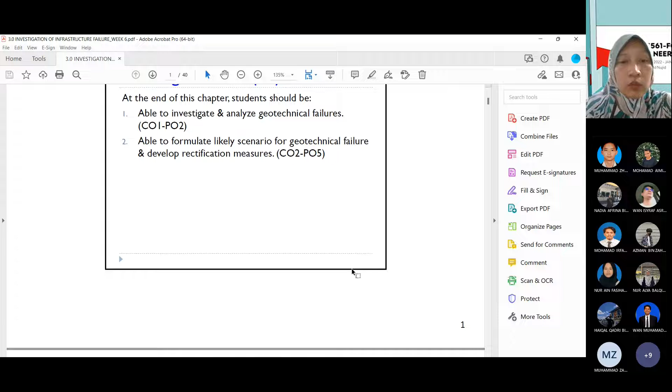The problem and the solution must be in line with the guidelines given by the public authority. When you propose a solution, make sure that it is applicable to be constructed on site, avoiding any future failures or hazards.

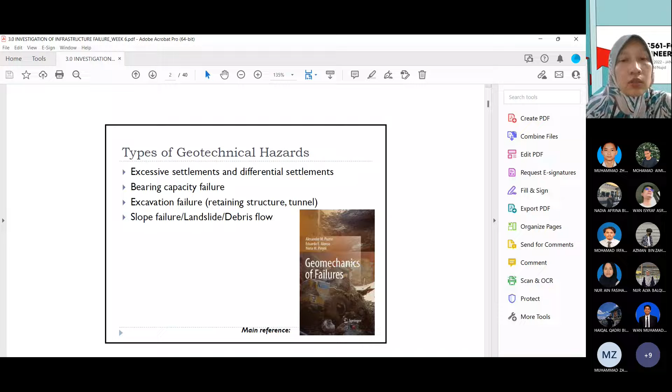These are the types of geotechnical hazards. This is also a textbook that you may refer to for further readings. It's very helpful because, as I said, some notes given here are short and not in detailed explanations, so for a full explanation of what's taught and what the notes given here mean, please read from this main reference.

As I said, your learning activities are split into two groups of geotechnical hazard. For example, you have to deal with excessive settlements and bearing capacity failures in week 6 and week 7. The next, week 8 and week 10, will be on excavation failure and slope failure.

In Malaysia, mostly we may encounter slope failures, landslides, or debris flow. You can take any past case history, such as what we had in Yan, for example—the news written on paper mentioned the landslide or massive flood due to the kepala air. So you can take that case on paper to be your forensic case history, and then how do you start investigating work from the beginning to the end.

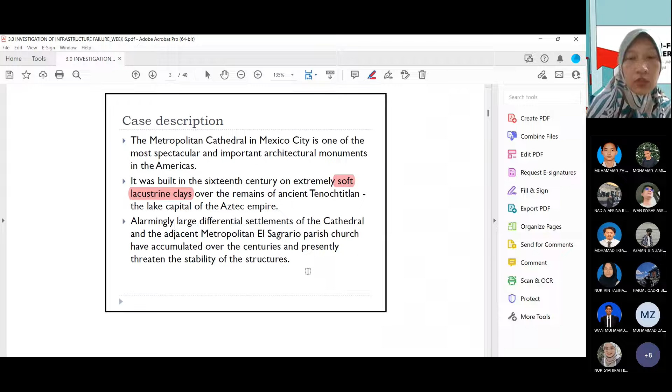If you check the definition of investigation, there are a lot of processes involved. It's not a one-step process. You have to do step 1, step 2, step 3, from the initial step to the final step, and these are the things involved in the process of investigation. For the stability of the structure, what they're afraid of is that the building may collapse. So we try to prevent any historic building or architectural monument from failure.

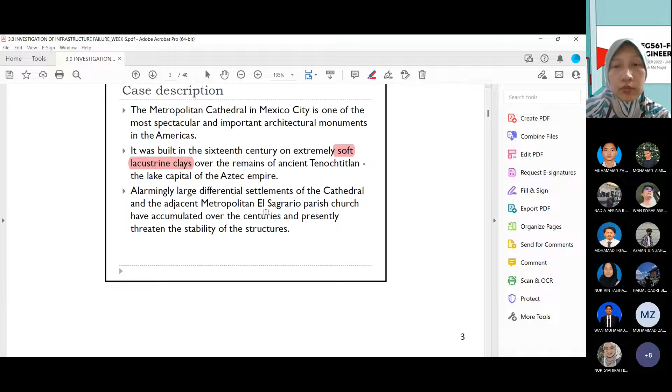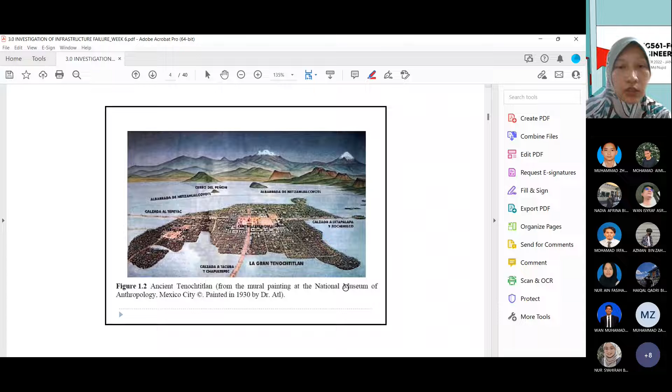Okay, in their study, they took it back to the recorded soil stratigraphy, the soil profile. This explains what causes trigger the settlement, the structural failure, or structure instability. You can see the geological history of the site, and the case description explains how it was started.

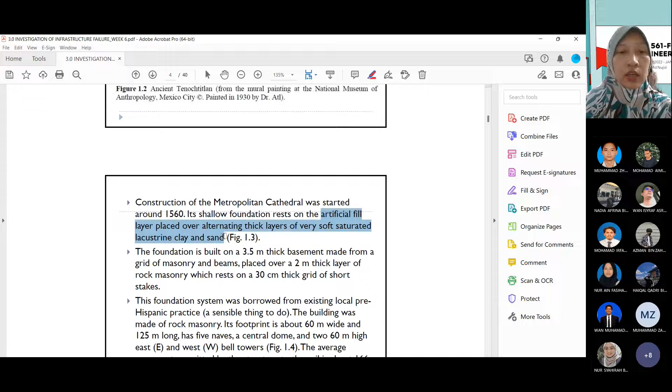The construction began in 1560, and its shallow foundations rest on an artificial fill layer placed over alternating thick layers of very soft saturated lacustrine clay and sand. So where is figure 1.3? This is figure 1.3. When you are reporting your forensic report for your project group, it is good to also include the soil profile, so we can understand what type of soil is beneath the structure, whether it consists of strong or hard layers, or weak or very soft soil. From this, we can see that on the left and the middle of the building, we have different soil properties at different depths.

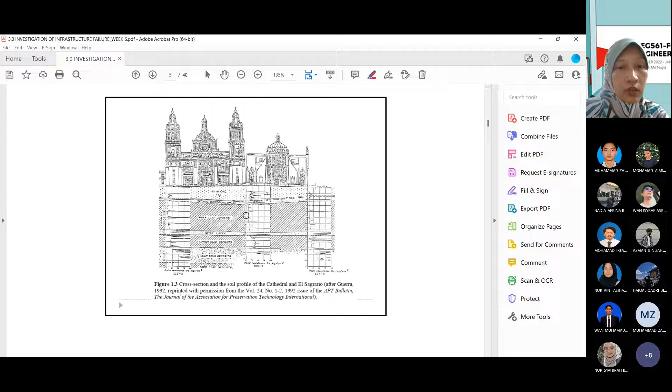This is also the explanation. It says the foundation is located on the artificial fill. When you have artificial fill, which is not located on the original parent rock or parent soil, there's a possibility the structure will not be stable. Because if you do fill, embankment or earthwork, it doesn't bring the original properties of the soil. So we are not sure of the artificial fill's characteristics. Is it capable of carrying the maximum load? When you decide to use fill earth material, you have to consider whether the soil layer with a certain volume can carry the maximum load from the structure.

Other than that, from this information, the foundation is built on a 3.5 m thick basement made from grid masonry and beams placed over a 2-meter thick layer of rock masonry, which rests on a 30 centimeter thick grid of short stakes. When you read this case description, you can see that this can be a cause of the failure itself. It had a basement, and the foundation system was borrowed from existing local pre-Hispanic practice. So as I said, when you have borrowed or fill material, what might it bring you in the future? Is it safe or unsafe?

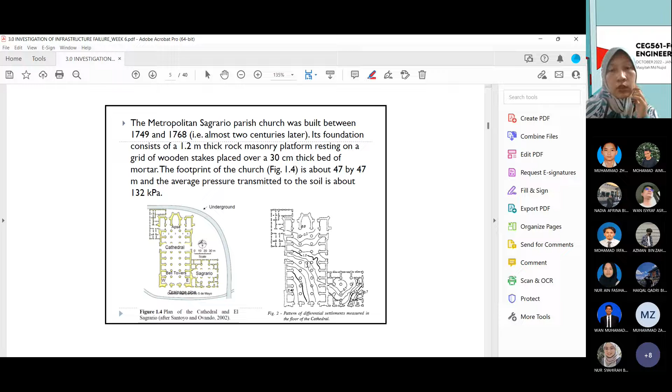So another important thing is on the stress: pressure, overburden stress, effective vertical stress, and then what is the stress history, because the overburden vertical stress can be calculated from the load applied on soil, and also you have to consider the stress history from the clay itself.

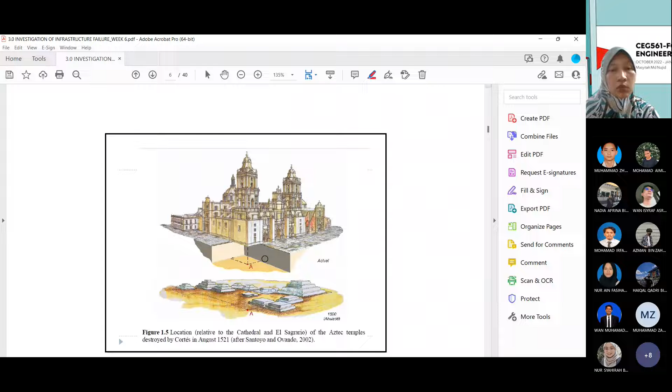So it shows here how they transform from the plan view of the building that relates to what has been reported 1,500 years ago. So this is the stress point at A. You can do some calculations on the effective vertical stress. So now we go to the analysis.

So it says that it is a very simplified analysis model, but then it relates to your basic soil mechanics knowledge, such as how do you calculate the contact pressure at point A, and what kind of loading at point A, is it rectangular, square, how do you calculate the stress concentration at point A due to the load here, because the load is not located on point A, it is located a few meters from A vertically and a few meters

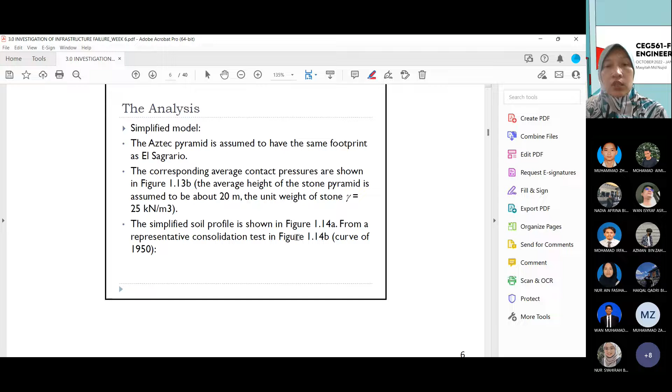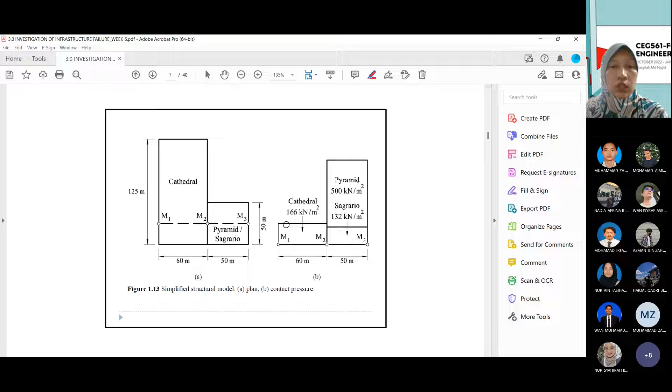from A horizontally. So that means it comes back to your understanding of how to do calculations on the contact pressure. Not to worry, because this case history also shows you the calculations involved using the simplified structural model, showing you A is a plan of the building and B is the contact pressure, how it changed from this kind of loading M1, M2, and then how it transformed the cathedral loading into 166

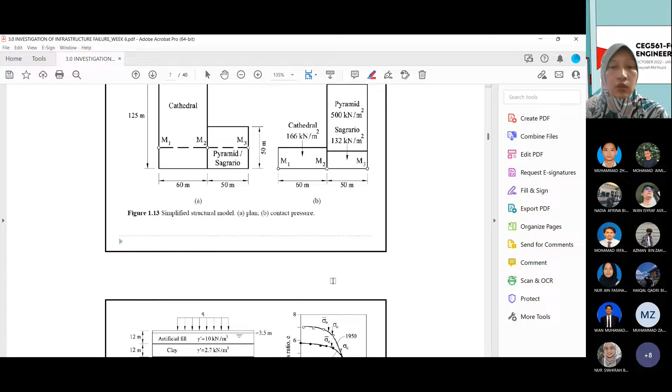kilonewtons per square meter, and the pyramid itself, and you want to do some calculations, and the next involved is the consolidation calculations, converting the loading's contact pressure as a Q and applying it on the clay itself. Because from the case description just now, it says that the foundation is founded on artificial fill with a height of 12 meters. Then you will see 3 layers in clay, 12 meters each.

So the clay itself is unstable, meaning that if you look at the clay properties compared to the sand, you can see that in terms of the modulus or the stiffness it might be different between the clay and sand. If you compare to the rock itself, we can say that among clay, sand, and rock, rock is more stable. That's why for this kind of problem, you have to find out what the foundations of the structure are. Is it resting on rock, on clay, or on sand?

And then again, as I said, if you are not doing the soil exploration investigation, what can help you is getting the information from past records. So you have to collect from the public authorities. You go to the library, find out the information about the building, and then contact anyone that can give you information regarding the case history.

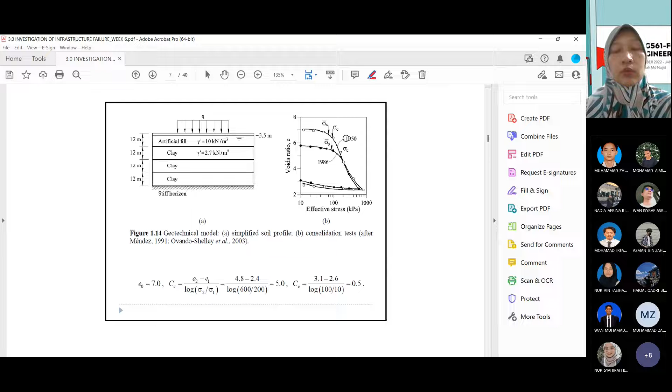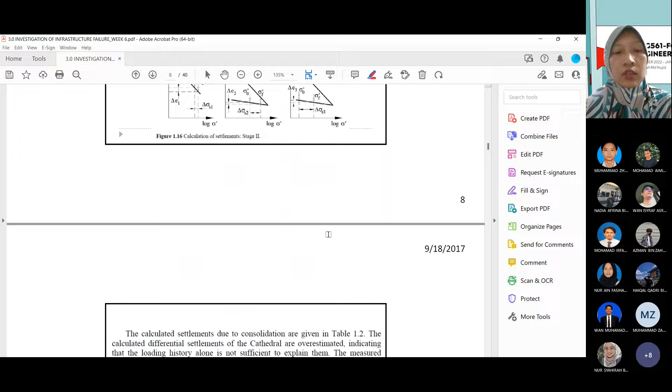So the e versus log stress can give you all those parameters, the Cc and then the sigma pc. What is important about these parameters? Because you want to calculate the settlement. So look at this one. Okay, this case history or this note does not give you the calculation of settlement. So I think you need to take a textbook and find out exactly the formula to calculate the settlement.

The next one is on the settlement due to consolidation. This one just gives you some explanation of how it is involved with the stress history from stage 1 to stage 2. Stage 1 is when the pyramid is built and removed, then the ground is levelled and the cathedral's additional stresses are built, and stage 2 is when the ground around the cathedral is levelled and additional effective stresses are built.

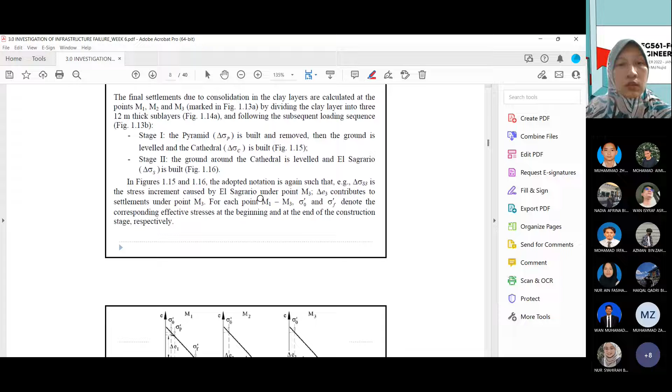So there are construction stages involved. Stage 1 and stage 2 are totally different. It shows you how it is constructed from one stage to the next stage regarding these buildings. When you are dealing with different stages of construction, they will tell you different effective stresses involved. You can see from the left side, the e versus log stress curve, and in the middle, e versus log stress, the changes of the stress from the first graph to the middle graph and to the last at the right side.

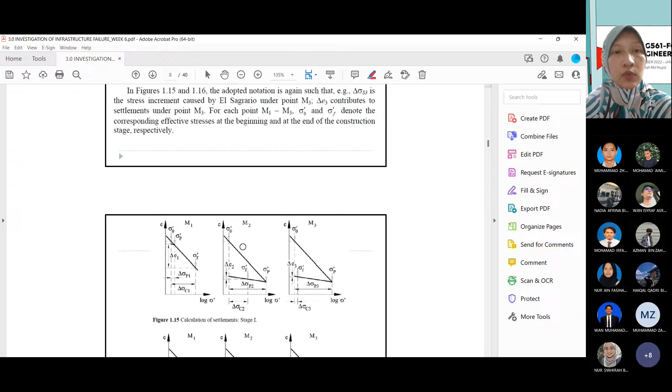On the right side of the graph, you can see the changes of the effective overburden stress and the final effective stresses involved when dealing with stage 1 and stage 2. So you can see here the calculation of the settlement in stage 1 and stage 2, and finally it is presented in the table, the differential settlement between the cathedral and El Sagrario for stage 1 and stage 2. You can see a huge difference between the present calculation and that measured in 1990.

Because from our understanding of consolidation, settlement can be defined from three types of consolidation. The first one we call initial consolidation, the second one primary consolidation, and the last type is secondary consolidation or creep. So when you go in depth to investigate this case history of the cathedral and El Sagrario, you can see differential settlement values from the past in 1990 to the present and to future predictions of settlement.

Because of this, it will change according to the stress effect, the stress history, and the effective stress acting on the soil. What we want to relate is that the stress will give you different values compared to the present and past due to what we call here the weathering process. The stresses also change. Let's come to the stress history.

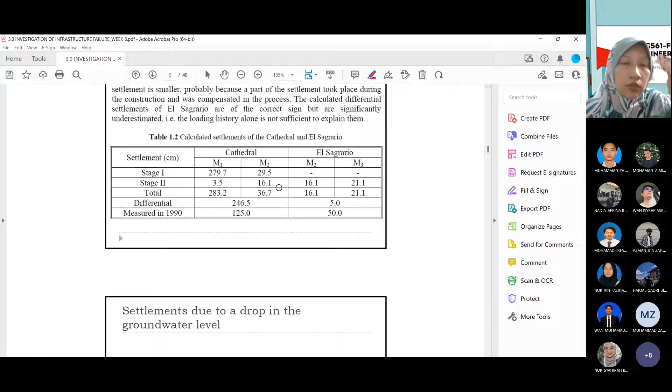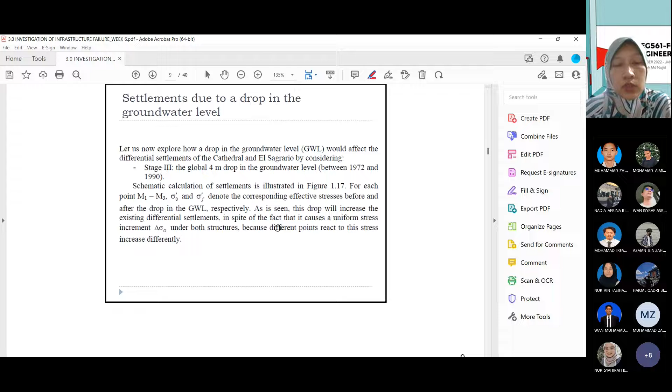Okay, now it shows you that settlement can occur due to the groundwater level. Of course, the groundwater level changes over the years. The time during construction will not be similar to what we have in the present days. So due to some drop in the value, there will be some existing differential settlement. It causes a uniform stress increment delta sigma o under both structures, and the points react to this stress increase differently. The explanation of the pore water pressure effect can be seen from this stage here.

Just to tell you, when you want to do future predictions on this issue, for example where staged construction is involved, we have to split our process into a few stages in order to get the calculation analysis. So we have stage 1, stage 2, and stage 3. Each stage will tell you different stress values. You can see that changes of the stresses give you changes in the stability and deformations.

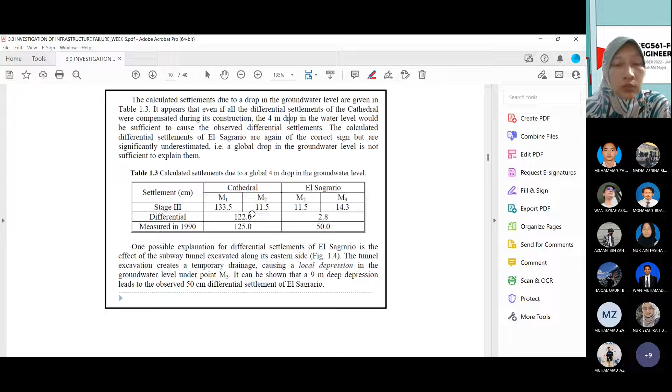You can see now, if you involve the drop in groundwater level, the differential value in the present days and also measured in 1990. So it says that what happened now is due to the long processes involved from after construction to the present. There may be some changes to the structure and to the subsoil. This kind of discussion can be included, for example, that the simplified geotechnical model of the problem cannot claim exact predictions of differential settlement.

So it's only focused on the effects of interactions of the neighboring structures, loading history, and the global and local drop in the water level. So it's only highlighted 3 causes. So the first cause is the structure next to the point, meaning you calculate the contact pressure, and then you look at the loading history, and then you take one cause due to the groundwater level effect.

So other factors maybe can be put also in the analysis or in the report, but we are not sure why it's not included here, maybe due to limited information. So the smaller than predicted differential settlement of the cathedral may be attributed to the correction measures carried out during its construction and later. So this simplified model, however, has been sufficient to achieve qualitatively correct predictions of differential settlement of both structures of meaningful order of magnitude. So it demonstrates the power of simple geotechnical analysis in understanding the complex process behind some geotechnical failures.

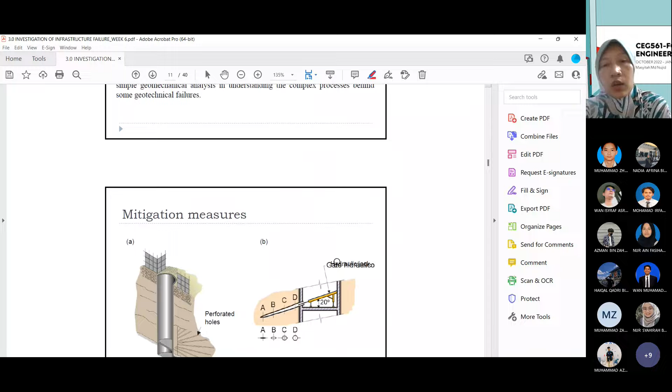So after having done the analysis, you need to come up with the mitigation process. In this particular case, it is proposed by using a perforated hole. It tries to give water flowing up from the subsoil. So you can see that this one is a perforated hole provided by some of the tube here, and then you need to do some under excavation below the structure, and you have a vertical shaft. These are the processes involved in the mitigation works.

So during the construction also, you need to prevent any failure, because remember, when we are doing the mitigation, the existing structure is there. How are we going to prevent any structural failures? And then we need to do some detailed work. I mean proper propping, or we have the proper sheet pile, we have a proper deep excavation that can avoid future failure.

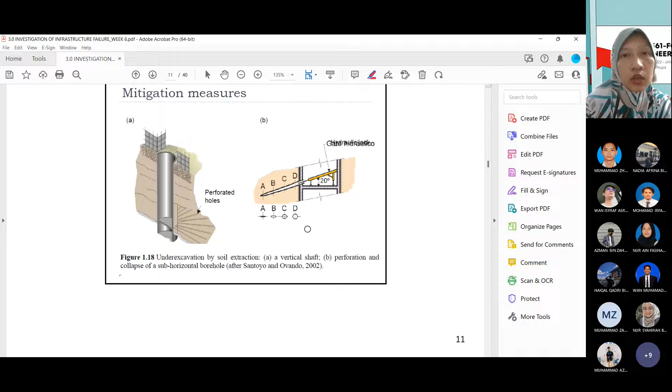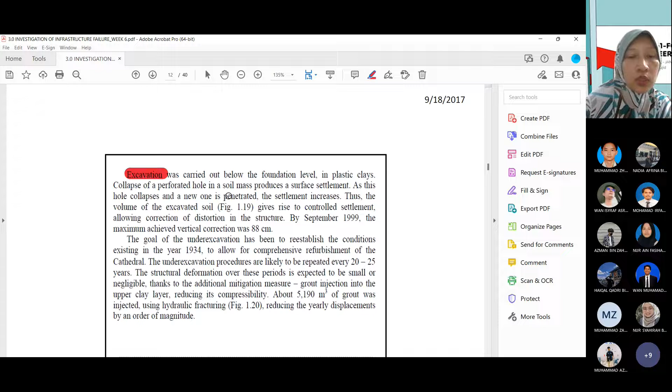Okay, I think this one you can read through. It proposed excavation first at a certain level below the foundation. Remember, it is in plastic clays. So collapse of the perforated hole in the soil mass produce a surface settlement. So this hole collapses and a new one is penetrated, so the settlement increases. That is the common thing we might expect from what we have on site. So the volume of excavated soil gives rise to controlled settlement, allowing correction of distortion in the structure. So by doing this, it tries to balance the differential settlement found from one location to another location.

So the goal of under excavation has been to re-establish the condition in 1934 to allow for comprehensive refurbishment of the cathedral. So the under excavation is likely to be repeated every 20 to 25 years. Remember, the case history that I presented just now is on a historic building. With a historic building, we have to do long-term or periodic mitigation work, done in certain durations. So it's stated here, what has been done in 1999 can be replicated or done again for the next 20 or 25 years, because we want to prevent the historic building from collapse, because this is for future generations.

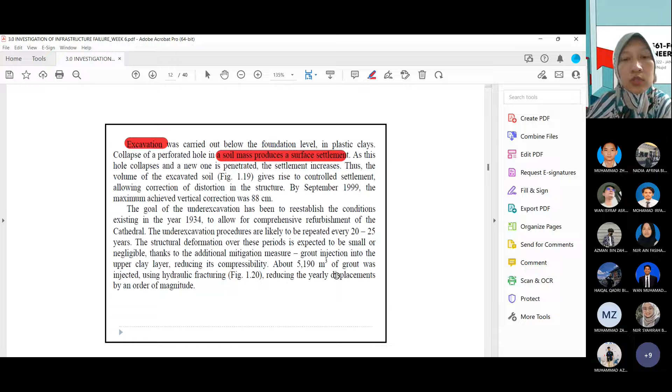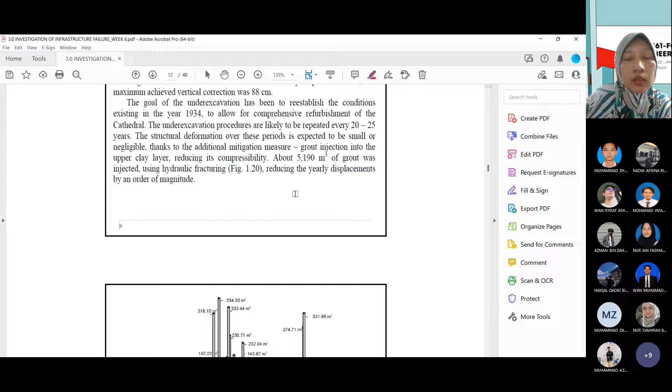When they talk about the monument, about the old museum, they can see it with their eyes, not only through written words. So the good thing about mitigation is it can be seen in the future by anyone who likes to see a real building. And besides having the perforated holes, it was also grouted, injected using hydraulic fracturing, which reduces the yearly displacement by an order of magnitude. So there are other things that can be included during the mitigation works.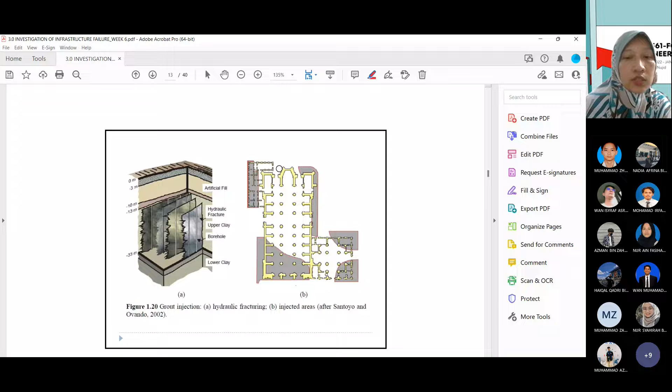So these show, early on, the floor plan of the building, and then a plan of the failure. Later on, when you come out with the mitigation work, you can highlight a few spots where you have proposed to do remedial construction or remedial work. For example, this one. It shows that on the A side, or the left side, the figures indicate the positions of the hydraulic fracturing, and through the floor plan, you can see the injected areas being applied to the building.

Okay, not to forget, when you talk about forensic engineering, what can be taken as a lesson? Why do we have to highlight a lesson that can be learned from the past case history? It is because we want to prevent any future construction work from repeating the same problems or the same mistakes. So when they come out with this lesson learned, at least you, as a future geotechnical engineer, wherever you work, can take this as part of your self-experience.

Somehow, experience cannot be taught. You have to experience it by yourself. But somehow it can be learned through reading. So that's the purpose. Some histories of failures write on the lessons. So there are three things that can be highlighted from this case: the loading history, the distance between the neighboring structures, and the regional subsidence. So these are the things that are causes of the failure.

For example, the history of the previous construction and the sequence of the current one will largely determine the pattern of the differential settlement of the neighboring structures by changing the compressibility of the soil foundations. It says that for loading history, when you want to build a building on clay and want to prevent any differential settlement, you have to check the stress history of the site, the stress history of the clay. Is it overconsolidated, normally consolidated, or underconsolidated clay? So these are the things that we try to highlight.

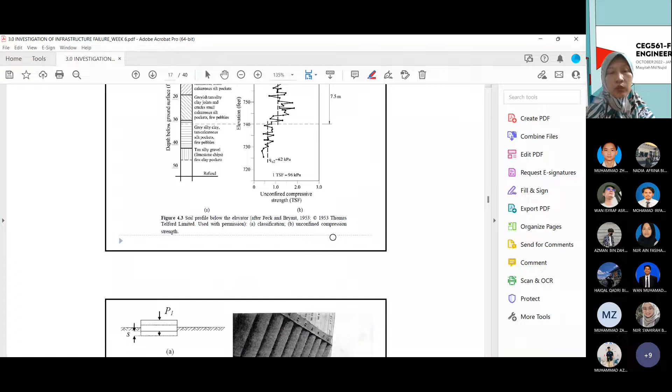And again, it's very important to have the soil profile. The strength of the soil can be obtained from the cone penetration test or the JKR probe test, or if you have more money, you can conduct a standard penetration test. And then look at the failure. Is the structure tilted, totally rotated, or totally settled?

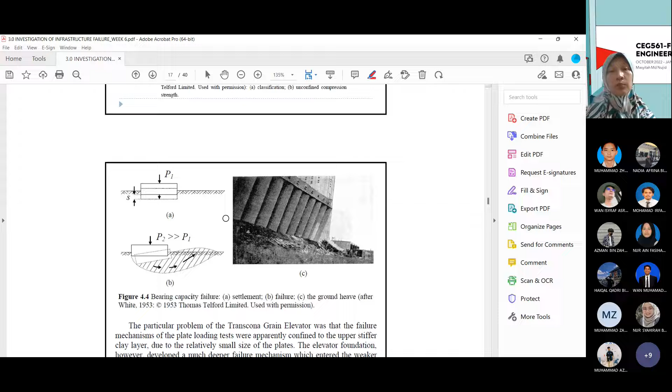Remember, when you are doing calculations for foundation stability, there are three modes of failure: general shear failure, punching shear failure, and local shear failure. All those failures are part of foundation stability: stability from overturning, from bearing capacity, and from sliding. So if you are doing a bearing capacity failure case, these are the things you might involve in the design analysis and calculation. Okay, now as I say here, choose one theory. Is it Terzaghi? Is it Meyerhof?

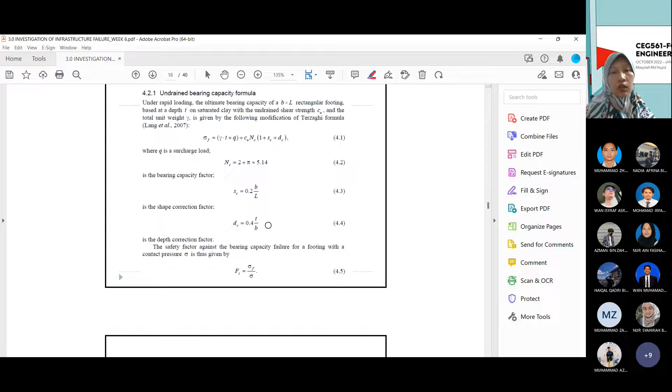And then what are the bearing capacity factors, NC, NQ, and gamma? Is there any inclination factor? Is there any shape correction factor you need to do? And what are the mechanisms of the failure? Is it involved with homogeneous soil or heterogeneous soil?

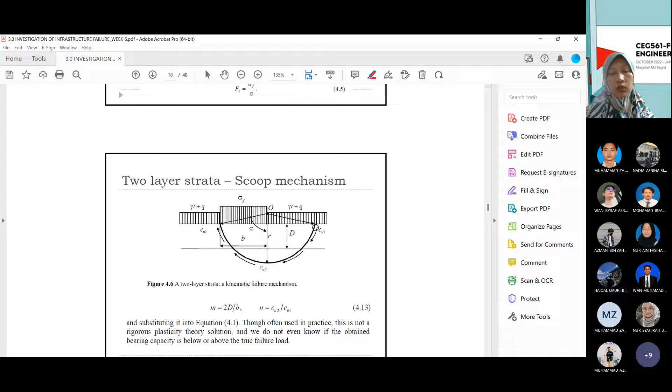And then what is this really related to the contact pressure, because you can see the M and N here, and how it guides you to do some kind of design and analysis. This is the thing, for example, what parameters are involved?

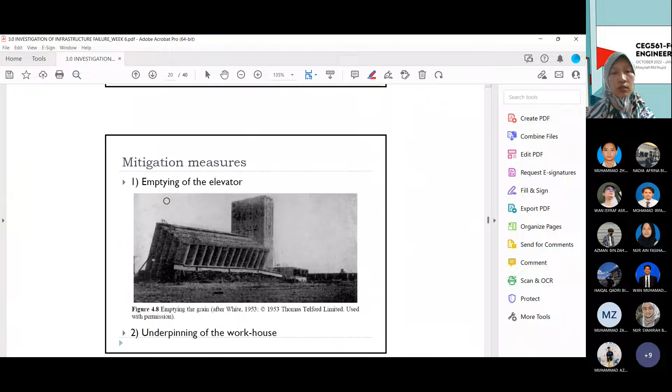What are the theories and characteristics, the soil strength, and lastly, how do you do the mitigation work? So it suggests a few works for mitigation, such as emptying of the elevator, or you do the underpinning of the work-house. It is common to conduct underpinning of the work-house. You can read by yourself.

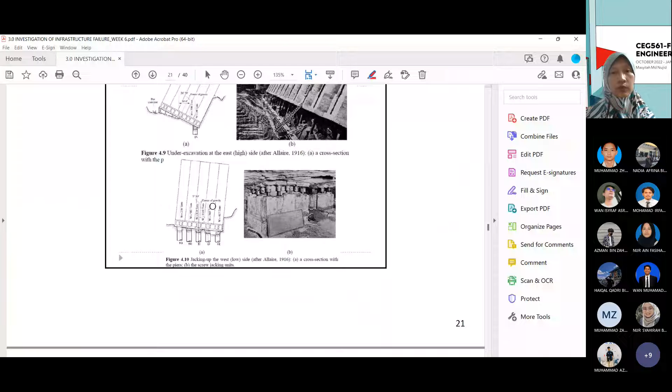Okay, what are the lessons learned that can be taken from this case history? The first one is site investigation. Why is site investigation highlighted in this case history for bearing capacity failure compared to settlement? Why is site investigation very important?

As stated here, of course we know that for any initial construction work, the first information we can get before having a design and analysis is through the geotechnical site investigation report. So the fact that other similar heavy structures in the area were founded on similar foundations did not have a locally weaker clay layer located below the typical stiff clay layer, which mess up all the analogies.

So throughout the site investigation, we can understand the behavior of the soil itself. For example, you are constructing a large structure carrying a maximum load. Is it possible for it to be built on clay, for example very soft and very weak clay, with a weak layer not having any hard layer or bedrock? There can be more problems to the structure, to the foundation itself.

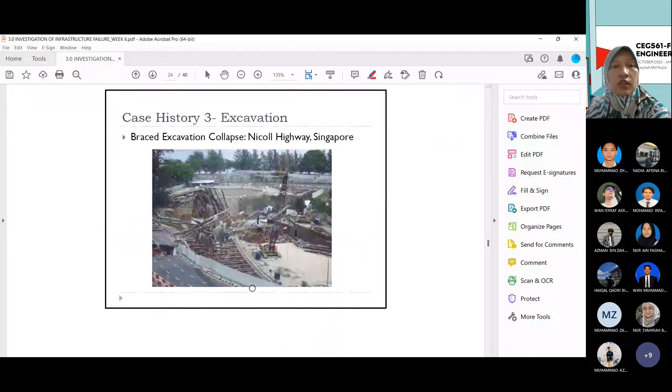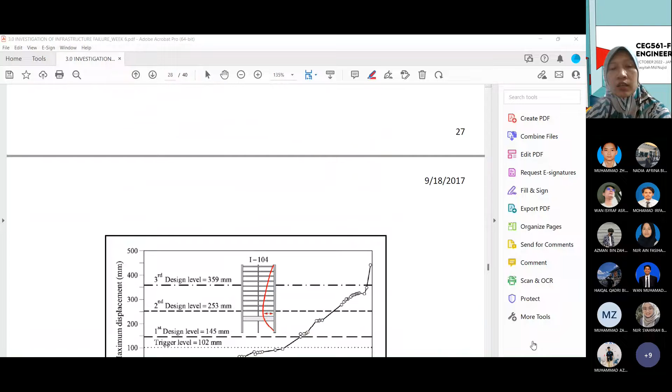For the excavation topic, I leave it to you to read by yourself. I think I will end my class here, because if you look at the learning activities, it's actually split into cases across a few weeks. For example, this week involves settlements and bearing capacity failure. You have to write up a short report, do a short presentation, record the video, and submit it to UFuture in the comment section. I will upload all the videos to my YouTube channel so you can view your submitted video from the channel.

For the following weeks, we will deal with geotechnical failures in slopes, and also excavations. Remember, as I said, to produce a good forensic engineering report, you need to be involved with on-site investigation. You go to the site failure, collect samples from the site, conduct testing, and if you have more money, you can do some post-exploration soil work to get information post-failure, which is important as parameter input in the numerical model. These are what we can relate to when producing a report.

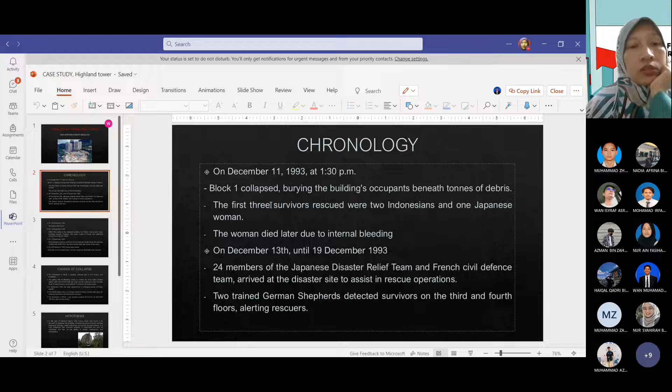If you do some detailed investigation post-failure of this building, the building became a haunted block. So nobody stays in the condo anymore after the collapse failure. And what are the causes here? Let me see.

Because what we want to see is the important thing that you can take or highlight from the study. Causes. Okay.

Okay, block 1 became unstable due to soil erosion and landslide. The piping was insufficiently strong to contain the extra water.

Had you recorded any rainy season in the past few weeks before the failure occurred? She mentioned that in December 1993, the area experienced a prolonged period of heavy rainfall. It should be at the first one. And landslide began after that prolonged period, correct? Right, so the important facts are there.

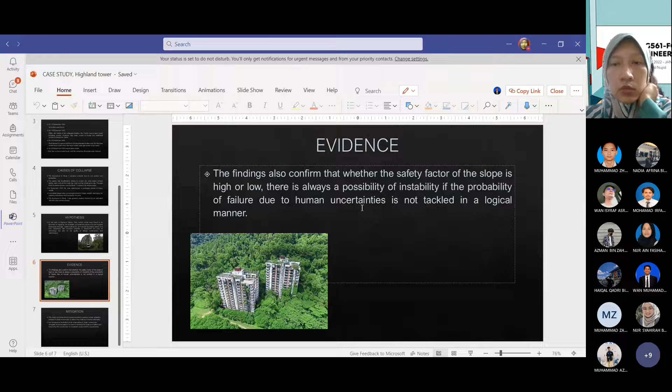Evidence. How does this support the hypothesis? The finding also confirmed that whether the safety factor of the slope is high or low, there is always a possibility. Okay, this is not enough.

Sorry to say, just my opinion, because the failure already occurred, and I think if there is no mitigation or anything, you must highlight why the mitigation was not undertaken during the time, and what are the assumptions involved for mitigations, and what information can support your hypothesis in terms of the design and the analysis.

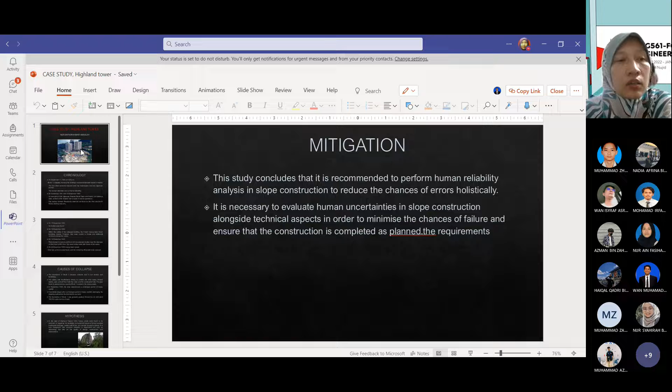I'm not sure, maybe the criteria set by Mrs. Aniza is not what I want from all of you, but it can be acceptable as long as you understand what you are doing. But just now you were focusing on the structural failures. For this topic, you can bring the same case history in the next chapter as the geotechnical failures. How do you connect the structural failures to the geotechnical failures?

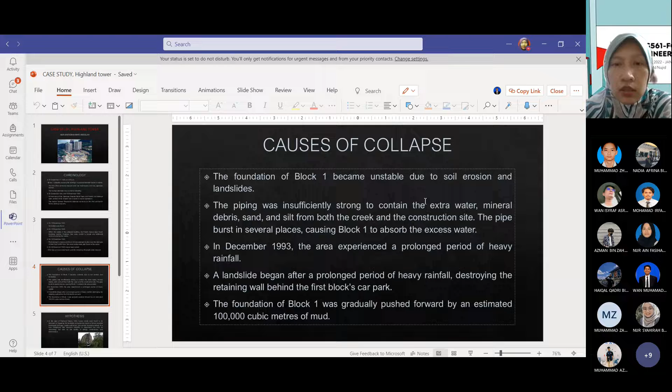So if you can see from the causes of the collapse, it should highlight the structural failures. For example, she mentioned a retaining wall failure, and pile foundation failure. It would be good if you could elaborate more on how these failures occur for the pile and also the retaining wall.

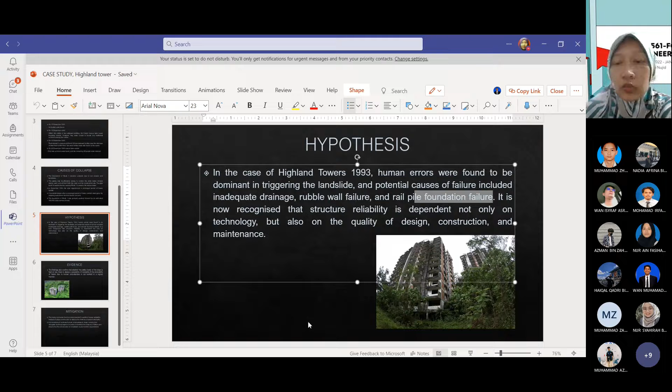When you go to the next chapter, you can talk about the same case history, but you need to top up the information from the geotechnical knowledge, such as the soil profile and the strength of the soil during the time. If you do the mitigations, what is the strength of the soil at that time, and what are the suitable mitigations to be carried out in the future? Okay, this is one example.

Okay, so far I can, okay, if you...

Let's say there are any options in your future - I stated you have to choose from any newspaper cases. So I hope you can take from there one case only that relates to the geotechnical failure according to the weeks given: week 6, week 7, week 8, and week 9.